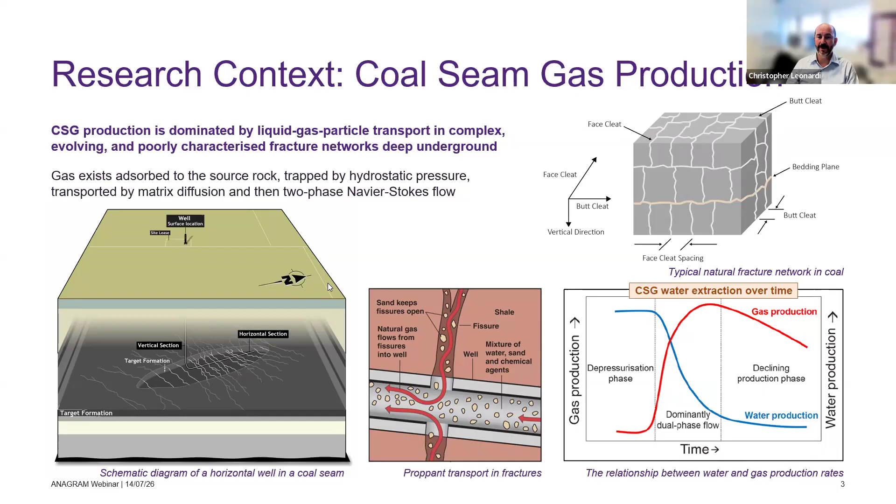So the flow physics is incredibly complex, both prior to production and then once production starts. And the regime changes dramatically. We go from situations of pure water flow through to commingled water and gas flow to predominantly gas flow as well. And these things happen in, as I said, not just a primary induced fracture, but a range of cleats that interact with that fracture. And we use high fidelity modeling to try and answer some key research questions that relate to this problem.

And I should hopefully have this animation playing. It's a little laggy at the front, but what we see here is just a rendering of one of our analyses where we've got particles suspended in a primary fracture. You might be able to tell that this is a shear thinning fluid. And this fracture interacts with some branching cleats, which cause leak off of the fluid and also the formation of particle occlusions due to size exclusion at these fractures here. We can't see the fluid. We've hidden it so that you can actually see what the particles are doing.

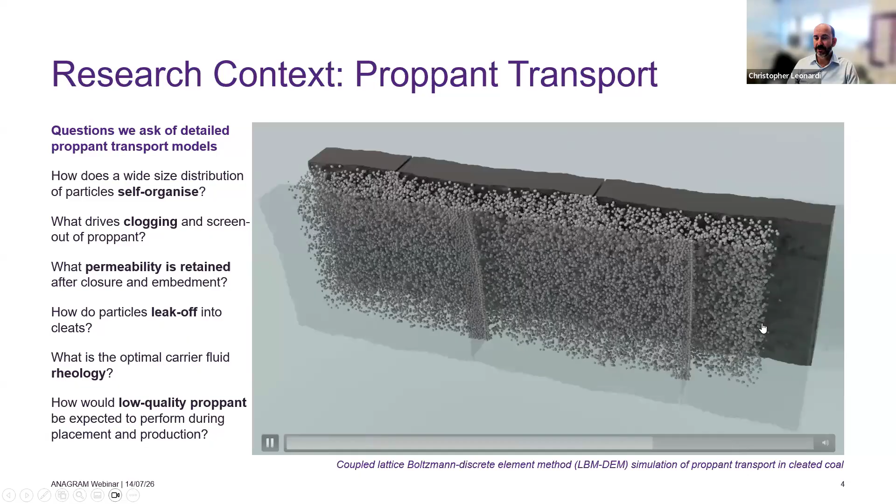But the types of questions we ask of models like this are, how do these particles self-organize when they are polydisperse? What drives clogging and screen out of our proppant particles? What's the retained permeability of our fracture after we have stopped pumping fluid?

How do particles leak off into the cleats? What's the optimal carrier fluid rheology? And as I mentioned earlier, how might a low quality proppant perform in this type of application?

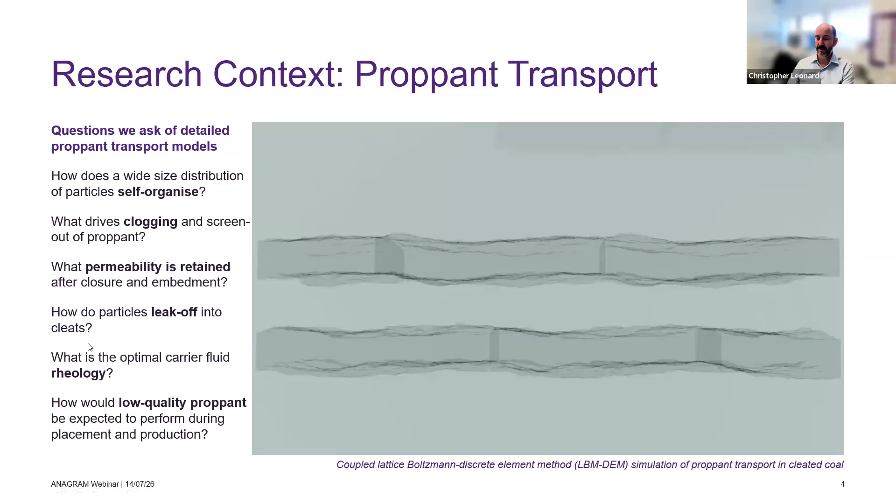As you can see in my figure caption there, we do this work using coupled lattice Boltzmann discrete element modeling. And I'll only very briefly describe that here because I don't think these things are new to anyone that's on this Zoom meeting. But we use the LBM because it's very effective and efficient at porous media flows where the geometry is very complex and also where we would like to couple our flow to a large number of moving obstacles like discrete elements.

And as we were discussing just prior to the start of my presentation, the LBM is no longer a research code. It's widely distributed with commercial CFD solvers. And although it's very good for porous media flows, it's probably more prominently used in vehicle aerodynamics, and some large companies have bought effectively research LBM codes to do aerodynamics of cars and trucks in a commercial setting.

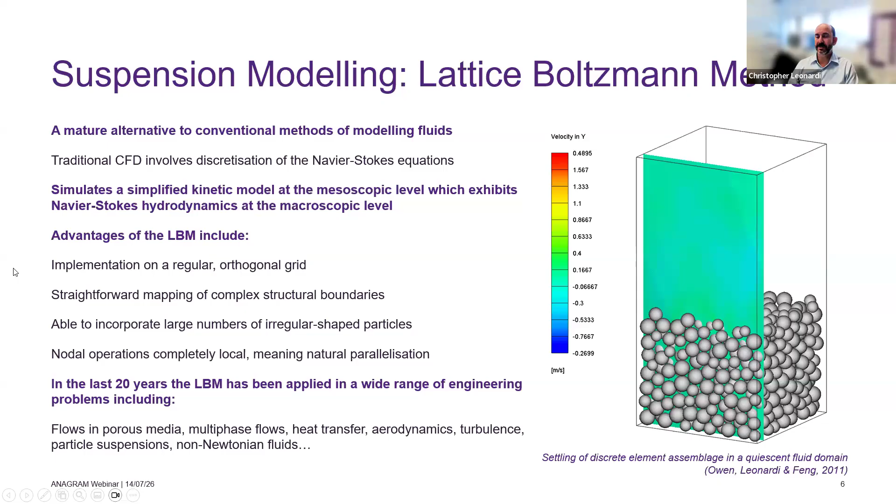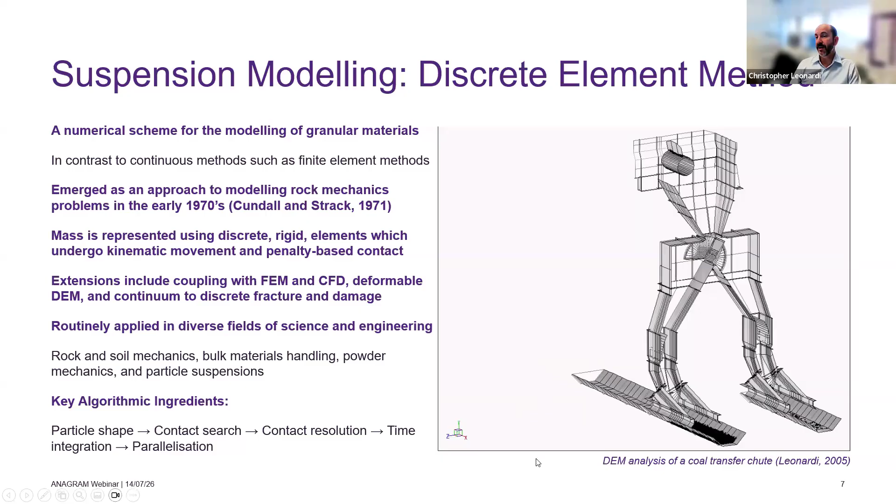And I remember presenting work like this at the International Conference on Bulk Materials Handling that is held in Australia, and being one of maybe the only people presenting bulk materials handling work using discrete elements. And these days, I haven't been to that conference series in a long time, but I do know that the work is somewhat dominated by computational analysis now, which is nice to see, but certainly not something that I'd take credit for.

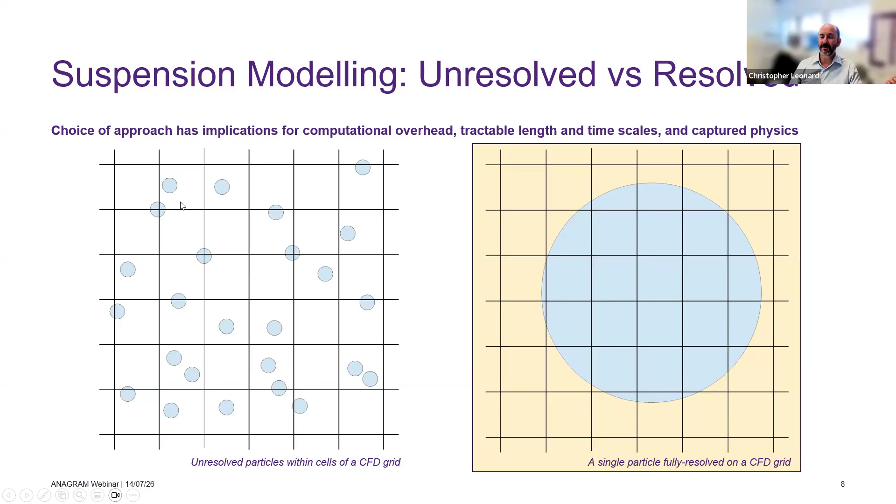So for that introductory video that I showed you, we would be talking of hundreds of millions of lattice Boltzmann grid points, even though the particle count is on the order of 5 to 10,000. And the memory requirement on GPUs is also substantial. So tens of gigabytes, and some of the really big analyses are approaching 100 gigabytes. And so this is to be contrasted with, say, a CFD DEM approach using finite volume, where the particles sit as a mass fraction within a finite volume cell, and the momentum equations are coupled accordingly.

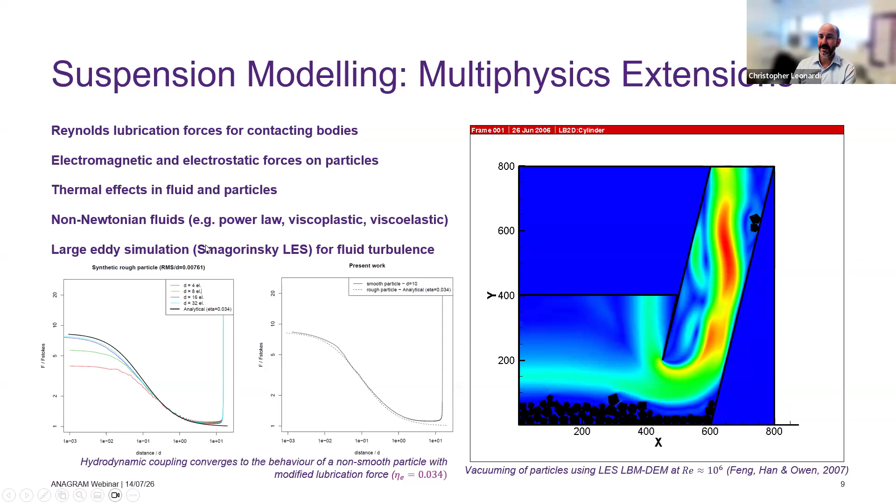And in particular, an implementation of Reynolds lubrication that acknowledges the fact that the Reynolds lubrication force is never truly singular for particles that have some roughness that's relevant to their length scale. And so the force, as these particles get close together, asymptotes to some value, although there is definitely an additional finite repulsive force there. It's not infinite as the gap between particles approaches zero. And that's a very convenient physical reality that makes the modeling just that bit easier.

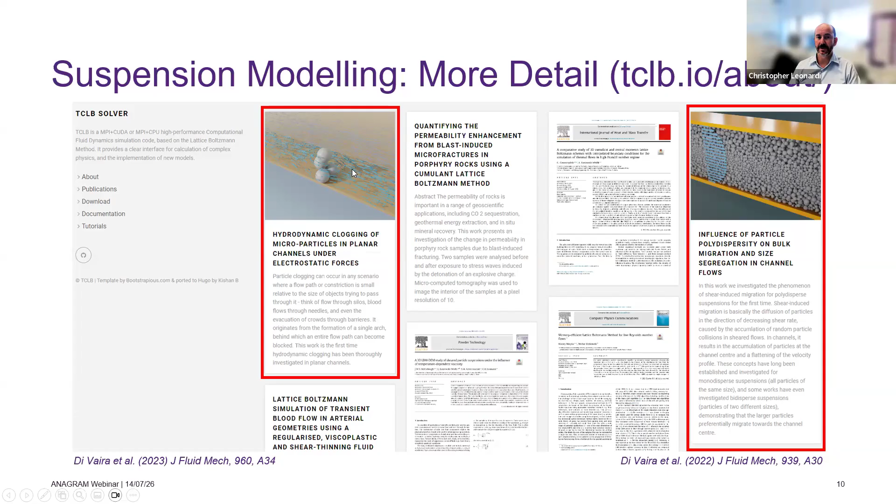So the tools we use are open source. So the stuff I show you today has been done using LIGGGHTS, which is coupled into our LBM code. We have previously coupled in ESyS-Particle, which is a DEM code from UQ. And my collaborator Lukasz from Poland has also coupled in another DEM code from France. I think it might be Yade from memory. But if you are interested in how this works, you can download the source, you can compile, and you can run some tutorials, and you can play with the stuff that we've been developing, and you can also read about the implementation in these two key papers that are summarized here.

So in terms of applications, the first one I want to talk to is about the transverse migration of polydispersed particles in a channel. And so from a coal seam gas perspective, what that was motivated by was this idea that microparticles could be injected with the hydraulic fracturing operation to enter branching cleats and stimulate them. So have these very small particles enter the branching cleat network and remain in place once the fluid flow has stopped to keep those cleats open when the well is producing gas.

And one of the key challenges to this idea is that size control on that type of particle is very poor. So if you are looking to buy a few cubic meters of micron scale particles, you are not going to get a very tight size control on the product that you purchase unless you pay a prohibitively high cost. And so for a particle that has a median size of, say, 20 to 50 microns, you will have a range of anywhere from a few micron up to about 100 micron of diameter in terms of the product that you get.

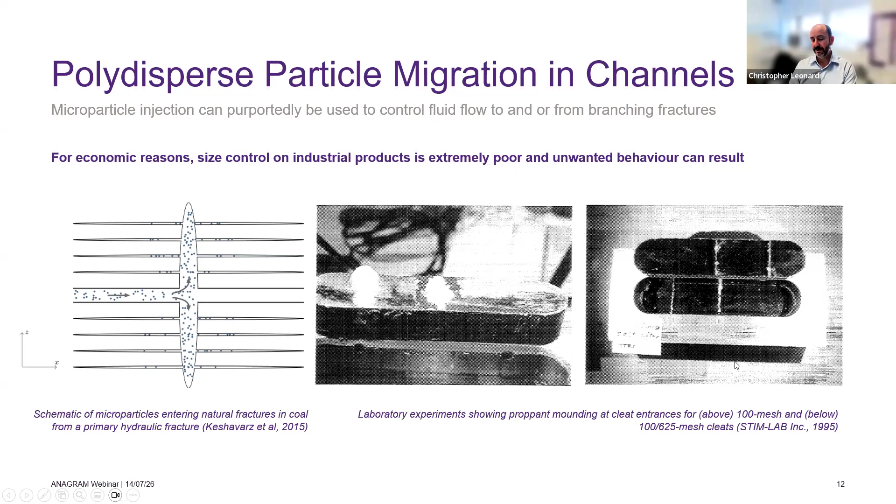And so we were interested in how this product might flow in a fracture and how it might enter the branching cleats that you can see schematically here next to this primary fracture. And we were inspired to some degree by some experiments that were done in the US back in the 90s that showed some really interesting behavior. So occlusion formation at these cleats, or otherwise cleats that admit but then fill with these small particles as well.

So in this particular problem, the length scale is not so much the issue, but more so the issue is the number of explicit time steps that are required for things to equilibrate. And there's two things that need to equilibrate here. There is the bulk migration of this set of particles inside the fracture, and then there is size segregation, and they happen at different time scales, and the latter happens at a much longer time scale than the former.

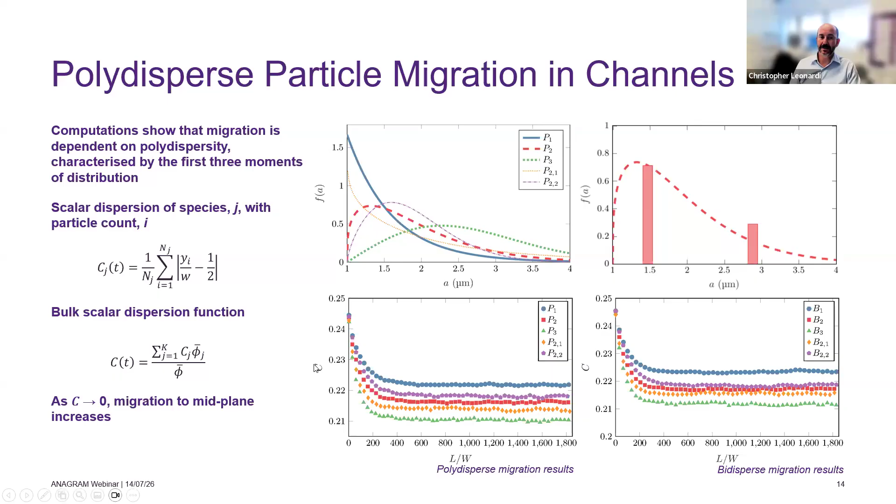If it's polydisperse and there's an infinite, well, a semi-infinite set of diameters, then it's much more difficult to classify which diameter particle you're seeing where. And so these links that we were able to show with the modeling are very useful. But I think even more interesting than that was the data that showed the emergence of this reverse migration, where small particles accumulate at the center of a channel under certain conditions, under what is known as reverse migration.

And so what we found was when the solid volume fraction is above 0.3, not even as high as 0.4, and the flow conditions are right, we start to see the formation of this plug of small particles, and this plug will actually start to over-consolidate at the center of the channel. This is not what we expected. We hadn't seen these types of results in the literature before, and it's actually the exact opposite of what we were trying to achieve, which was to have these small particles migrate to the walls and then find their way into the branching cleats and then deeper into the reservoir.

Why this happens, as far as I know, is not yet fully described, but we are kind of aligned with this theory that had been previously proposed, that the higher shear fluctuations of these smaller particles, particularly at the boundary of the plug, drives a certain number of them into the plug with time. And so small particles fluctuating at the edge of the plug eventually enter the plug and continue to feed that system.

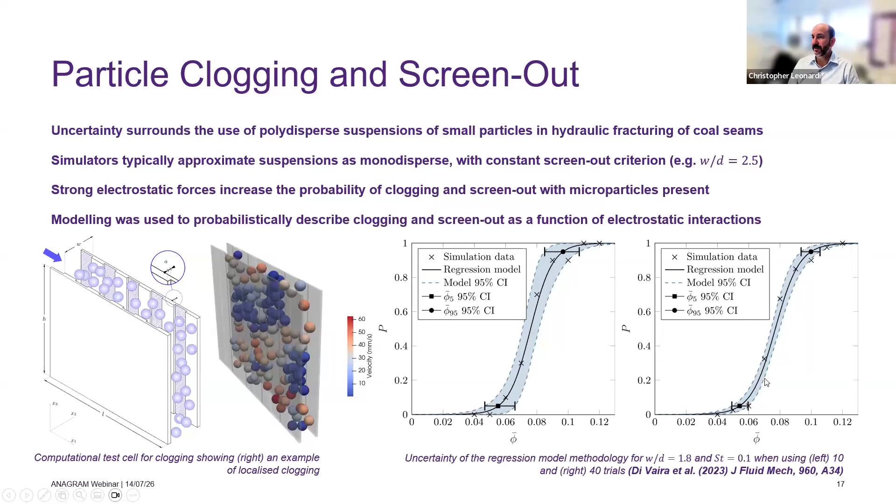So phi 5 is the solid volume fraction when you have a 5% probability of a clog forming. And phi 95 is the solid volume fraction when you have a 95% probability of a clog forming. And so we pick those numbers off from a bunch of different tests of varying parameters, and then we plot them on some maps that look like this.

And so we're plotting here phi 5, the bottom line with the squares, and we're plotting phi 95, the upper line with the circles, for a range of W on D numbers. And so the first thing that we notice is that you can form clogs above W on D of 2.5, and we saw that here up in these numbers.

What we also saw is that when you start with a very narrow fracture where it's only a little bit wider than the particles that you're transporting, and you get wider, clogging actually gets more likely. The solid volume fraction required for clogs to form drops quite significantly, and that's because of the mechanics of particle interaction. So just below W on D of 2, you have the ability for two particles to almost but not quite travel parallel to each other down the channel. And so when that happens, they interact with each other and the walls and they form a local clog.

And as you get wider again, we get this region around just over 2 where we saw no evidence of clogs ever forming. But then as you get wider again, you have the ability for 3 particle clogs to form. And so that's why we see these data here emerging. You can also see rather intuitively that as you increase the friction, which we tune for these models based on some other data, you increase the probability of clogging or you reduce the solid volume fraction required for clogging to occur.

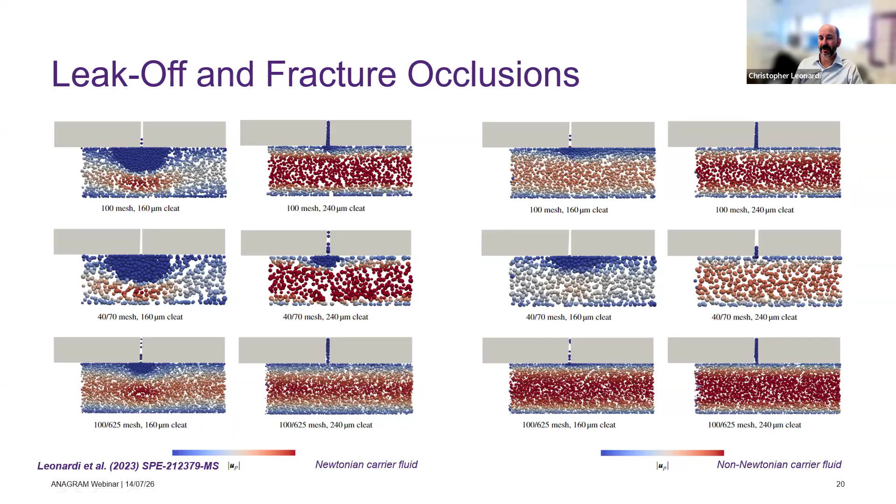Okay, so the last thing I want to focus on is this work here, which was to analyze the performance of what I'll call a low quality sand. And what I mean by that is a product that doesn't meet the API definitions of what a proppant should be like. And it doesn't meet those definitions for a couple of reasons. It's very angular. Its crush resistance might be a little bit poorer than what you would expect for an API standard sand. But being a non-API product, it's a lot cheaper.

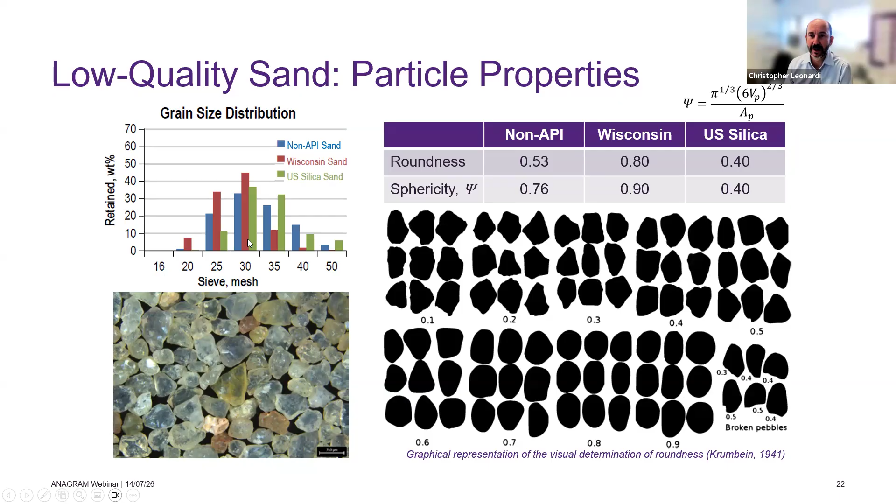And so if you are trying to source sand in southern Queensland, you have a limited number of API product suppliers, and they're not local, so they have to be transported from elsewhere in the country or have to be shipped in internationally. And so the idea for this work was to use a sand facility from southern central Queensland and the product that they provided, which looks like this photo here. Yes, very angular, very poor size control, and crush resistance a little bit mixed as well.

So we're interested in two things: how this product flows in the types of fractures it'll encounter, and then what it will do after it's been placed inside a fracture. And so we try to parameterize this as best as we can, given the wide degree of uncertainty with all these things. And so the first thing we do is we parameterize the fracture generation using a power law model of the fracture roughness, and then also incorporate the surface correlation and the aperture.

And so basically we generate our fractures from this mathematical model. We can inform the mathematical model from the statistics of some imaging. So we did some digital optical microscopy to determine what the roughness spectrum is of some coal samples. And then we use that to inform this model, which then allows us to generate as many realizations of rough fractures as we like, as you can see over here on the right-hand side. This one here has a mean width of 0.5 millimeter. It has a mean roughness of 20 micron, and the surfaces are perfectly correlated.

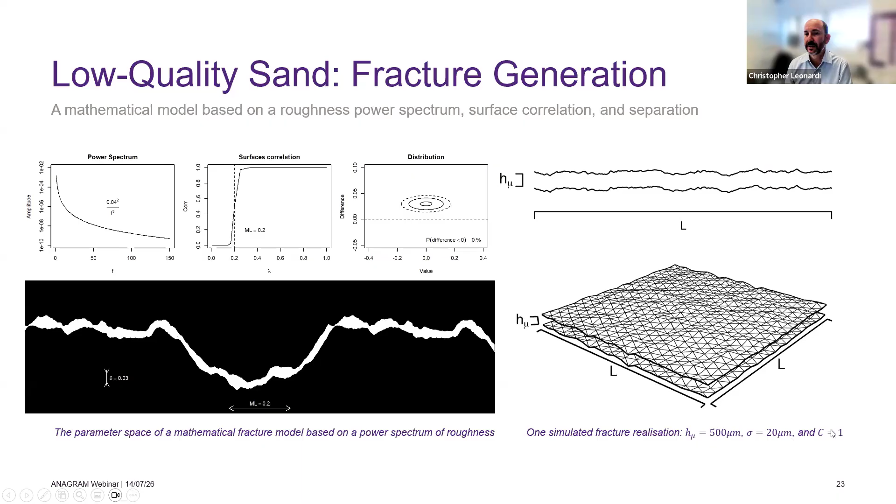Over here, you see some more examples of the fractures we generate, and on the right, you see one where the fractures are not perfectly correlated, so C is 0.8. At 0.8, the decorrelation is tricky to see by the naked eye, but it is there. And as you go below 0.8, it becomes more and more obvious that the surfaces are not perfectly correlated. In reality, these surfaces can decorrelate for any number of reasons, because of shear dislocation under lithostatic stresses, or because of mineral growth over time within these cleats, or any number of other reasons.

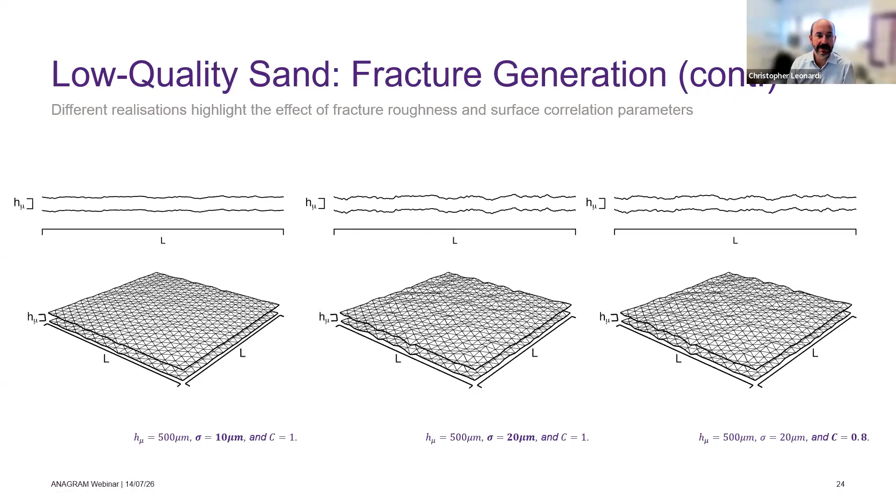The next thing we needed to do was try and parameterize our particle angularity. On the left-hand side, this is Lachlan's attempt at rendering or creating these sand particles based on their true statistics. To model with particles like this would be very expensive. You can see there are many facets describing each particle, and the contact resolution and detection for that

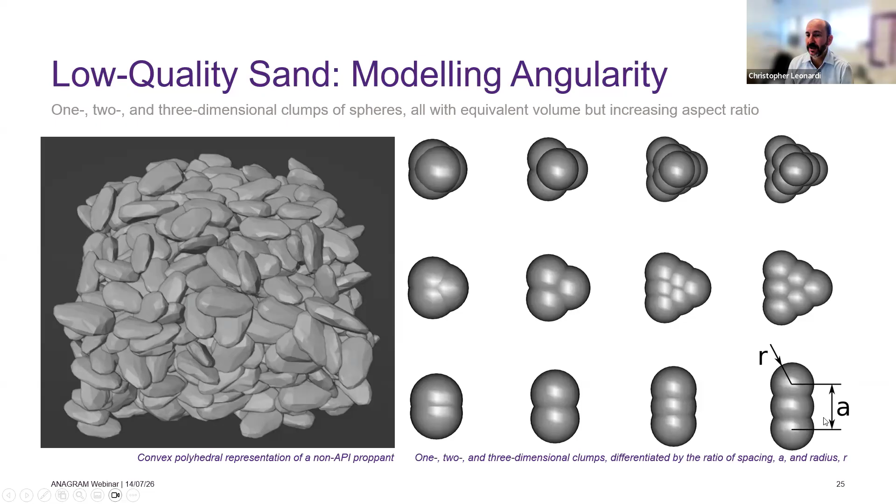would be very expensive. And so what we decided to do was build some canonical particles that were 1D, 2D, and 3D out of clumps of rigid spheres. And we described their shape based on the ratio of the longest length, A, along a side, and the radius of the particle that makes up the clumps.

Once we have some fractures and some particles, we can flow them, and they look like this. So you can see the zero-dimensional spheres, 1D clumps, 2D clumps, 3D clumps. And if you spend some time watching these different videos, you see local holdups occurring, particularly for the 3D and the 2D particles as they interact with the walls and other particles in the pack. But that obviously is of limited use from a quantitative point of view.

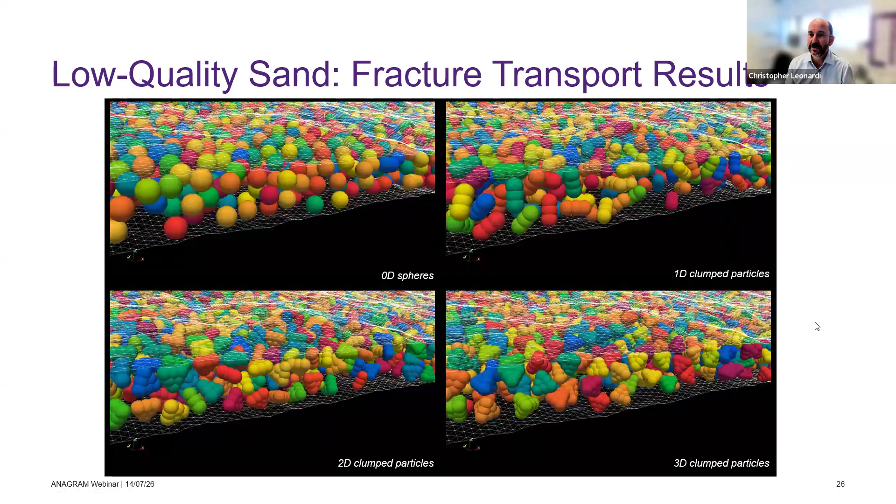So what we did with these data is we generated these graphs of flux versus volume fraction. And so on the y-axis, we have the flux in the fracture that's been normalized by the cubic law for Poiseuille flow in between two parallel plates. And on the x-axis, we have the volume fraction up to, of course, a number of about 0.6, where we would expect absolutely nothing to be moving beyond that point.

Our data from the simulations are the black lines with the solid black symbols. We also plot here some reference information from the literature and from the industry. So the first one, this dashed line here, is what you would expect from a Krieger-Dougherty suspension viscosity, defined like this, where the viscosity varies as a function of phi m, and phi m is your maximum flowing solid volume fraction. We also have on here the dotted line, the Kozeny-Carman law for effectively flow through a packed bed.

And on this graph, we also have this red line, which is a screen out criterion from the oil and gas literature. And what it shows is that, under these conditions, we would expect flow of this suspension to effectively stop at a solid volume fraction of about 12%, at which point it would drop down to flow through a packed bed. And so the flux, which is non-zero here, but it's a bit hard to see, would just be of the fluid flowing through a screened out bed of particles.

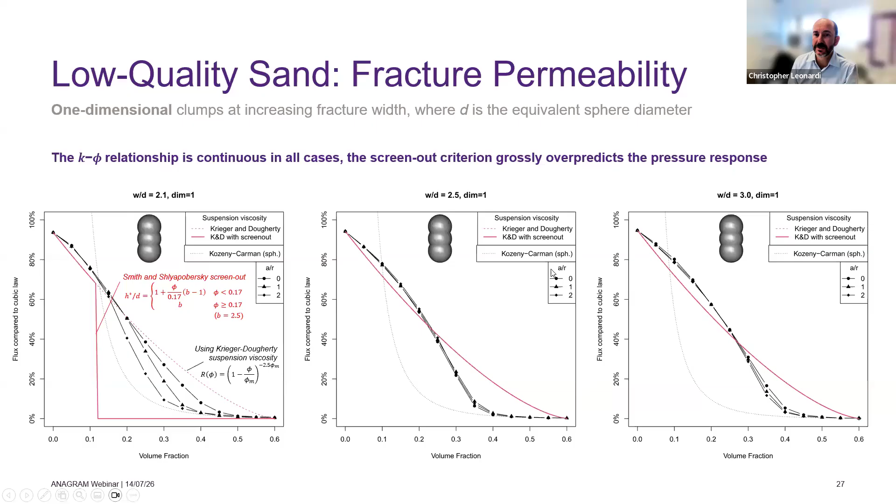But in summary, what we can say from these types of results is that the ability to flow these angular particles through a rough fracture is probably pretty good. We would expect the primary fracture to be more than wide enough for the angularity to not matter. And so whether it was a sphere, and some of the API sands are quite spherical, or whether it's one of these nasty angular looking things, they'll transport quite well.

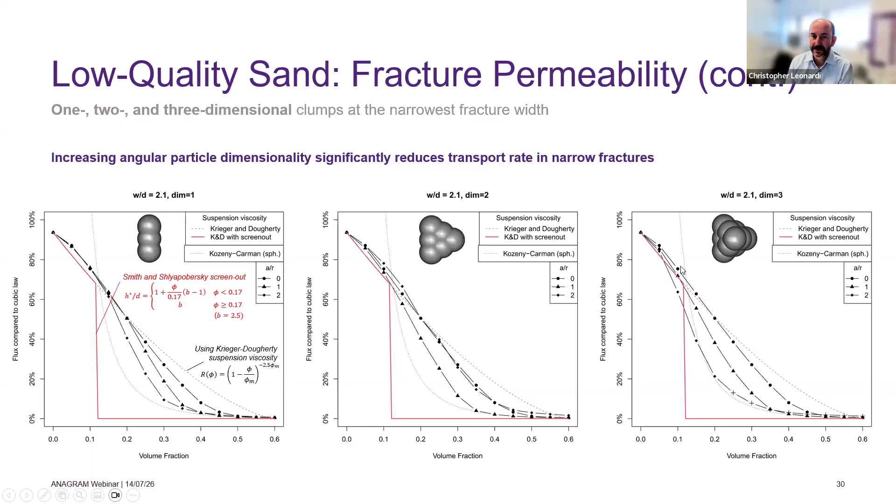Beyond that, what we did was then look at how packs of these particles would behave once you started to flow water and gas through them. And so imagine your primary fracture packed with these non-API sand particles, or packed with a Wisconsin sand, which is an API product, or just packed with some spheres.

And then you had fluids flowing through them, and those fluids could transport some smaller particles, some fines that could have been produced from the coal or from the adjacent sandstones, or some very small particles that were injected during the hydraulic fracturing process and are now looking to flow back. And so we're interested in how these things either screen out or percolate through these packs of particles.

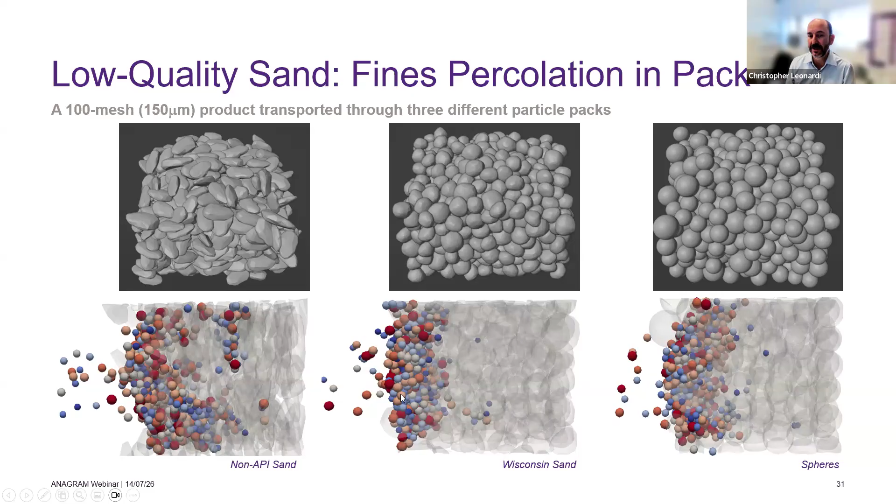What we did is, well, first we analyzed the pore space that's generated from these different packs. And so what you see is that for our non-API sand, which have a wide size range and are very angular, our pore size distribution is pretty broad. Okay, so we've got plenty of pores that are down in kind of like the 10 micron radius range, and then plenty that are up around 120. So there's quite a wide variation in the pore sizes.

And you can see that contrast when you look at the Wisconsin sand, which is more tightly clustered around the mean. And then for spheres, it's even more clustered around the mean, which you would expect because it is a spherical pack. So for this non-API sand, you've got some small pore throats and you've got some big pore throats, and they exist distributed throughout the pack.

So what we did in terms of modeling is that we created packs of these three different particles, and then we flowed 100 mesh product through them in suspension. So 150 micron particles flowed through these packs, and then we measured where these particles would end up in these packs. So if you imagine this graph from left to right represents the pack, we could measure the percent of deposited particles as we increase the depth into the pack.

We were able to check that our model is making sense by comparing the data for spherical and even Wisconsin particles, which are near spherical, to some data from the literature. That's this blue line here. And then what we could see is for our non-API sand, we were trapping a lot more particles in the pack than you would do if your pack was of spheres or of Wisconsin sand. And you see that in terms of the average breakthrough rate. So a much larger proportion of the particles entering the pack, but then getting trapped in the pack.

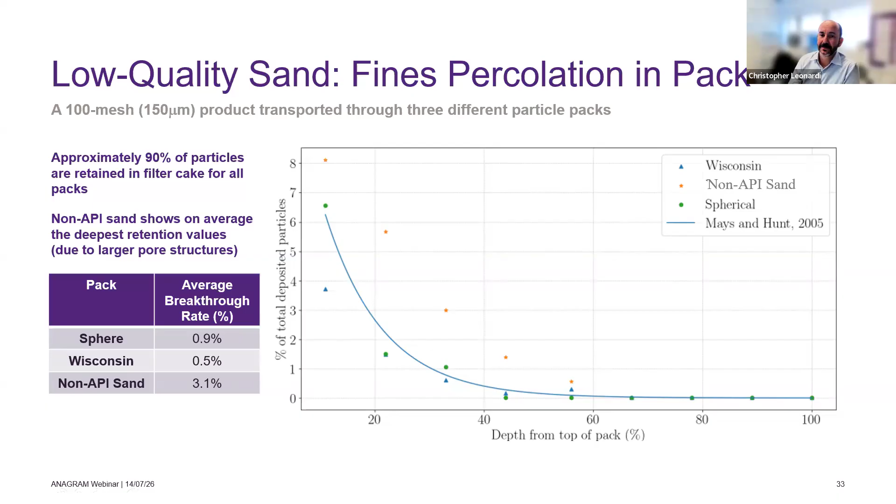And then going beyond that, you could see what that means in terms of the pressure drop in that pack. If you're first of all admitting more particles into the pack because there are some large pores, and then screening them out because there are some small pores, you start to see a degradation in the head loss. And so if you look at the stars here, that's the pressure drop or the head loss for our pack of non-API sand. We see about a 26% greater relative head loss in this pack than you would for spheres or for Wisconsin sand.

And so from an operational point of view, that's potentially problematic because you have a situation where you will admit lots of fine particles into your conductive fracture and then screen them out. And over time, you will degrade the conductivity of that pack, which is not good from a productivity point of view.

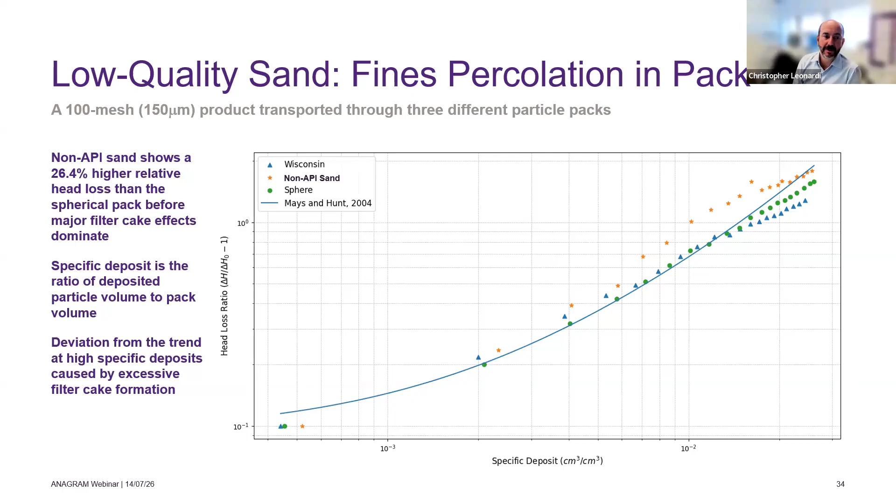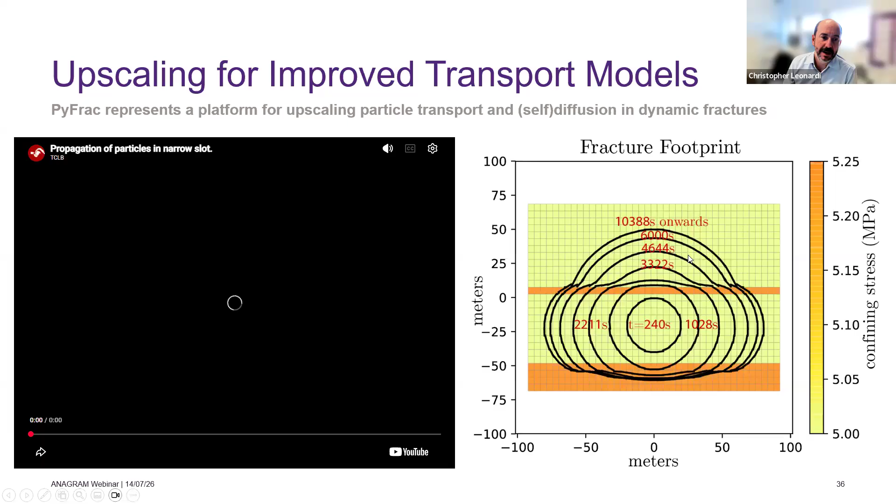But then on the right, some work that I started while I was on sabbatical last year at EPFL in Switzerland with Brice Lecampion and his group, who published PyFrac, which is a simple hydraulic fracture solver, which allows for the dynamic evolution of fracture width. Because in all of the work that I've shown today, the fracture width remains static. It doesn't change because of an increase in pressure or a change in the prevailing stress conditions. And so that's something that we feel is important for really understanding what's happening at fracture tips in terms of screen out as well.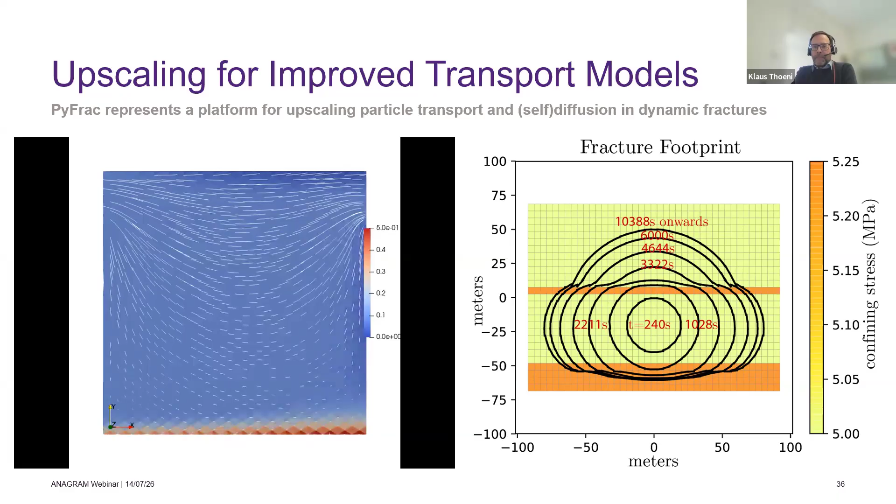I guess if you have a question, just unmute yourself. Yeah, can I start? Yeah, go ahead, Arman. So, hi, Christopher. First of all, sorry, I joined a bit late, so I didn't get a chance to say hi. I'm Arman from UNSW. Also, hi to all the rest of you. I think you just froze there, Arman. Yeah, we've lost him. Can you hear me okay? It's been cutting in and out, but I can hear you now. All right. So hopefully it stays connected.

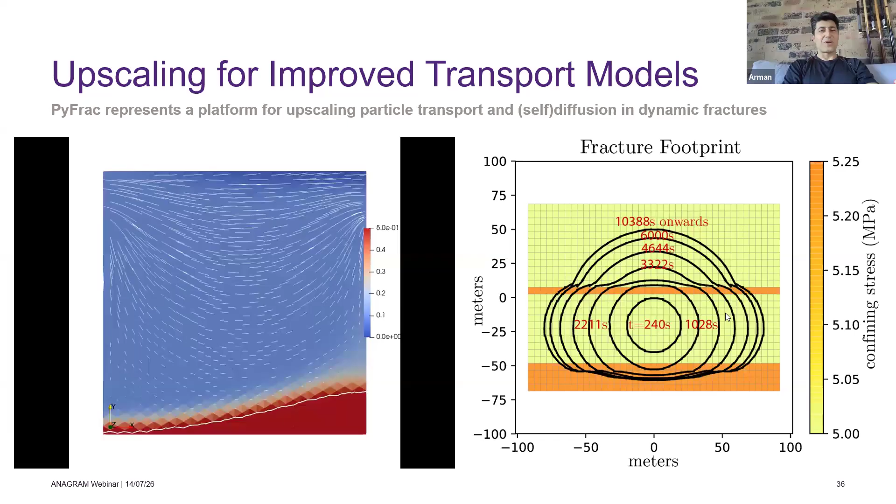So yeah, my question is on multi-phase modeling, which I understand you have done some work on. I kind of dabbled in it, modeling flow of water and air in an unsaturated porous media. And in most cases I encountered numerical instability. I think it was mainly because of the difference between density of air and water, and I couldn't get good results out of it. Not that I worked a lot, I kind of dabbled in it, but I thought I'd just pick your brain on that. What is your experience on that?

I didn't talk about that today, but I have some slides on exactly this. We're using a phase field LBM formulation, where we take those rough fractures that I showed earlier, and we solve for gas and liquid transport in these fractures. The contour here is showing the local fracture width, so it varies, and then the hatched region is the liquid, the water. The air is unhatched. So these have a density ratio of about 1,000 and viscosity ratio of about 100. And it's pretty robust.

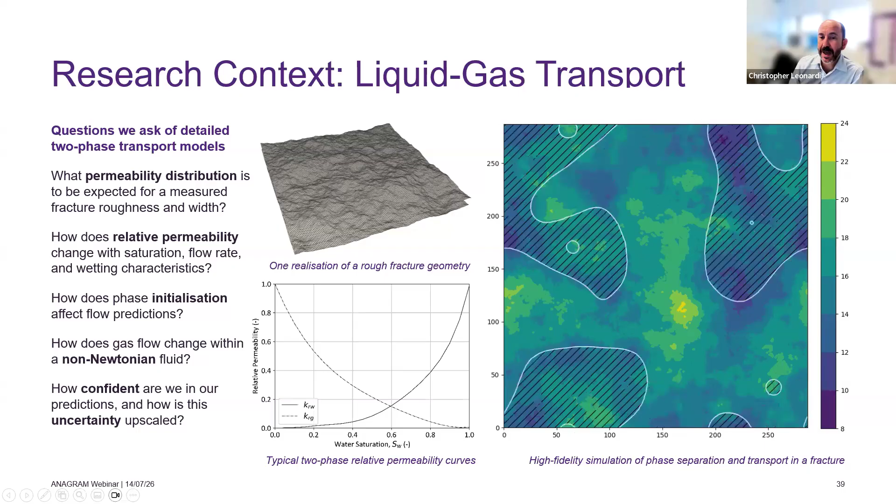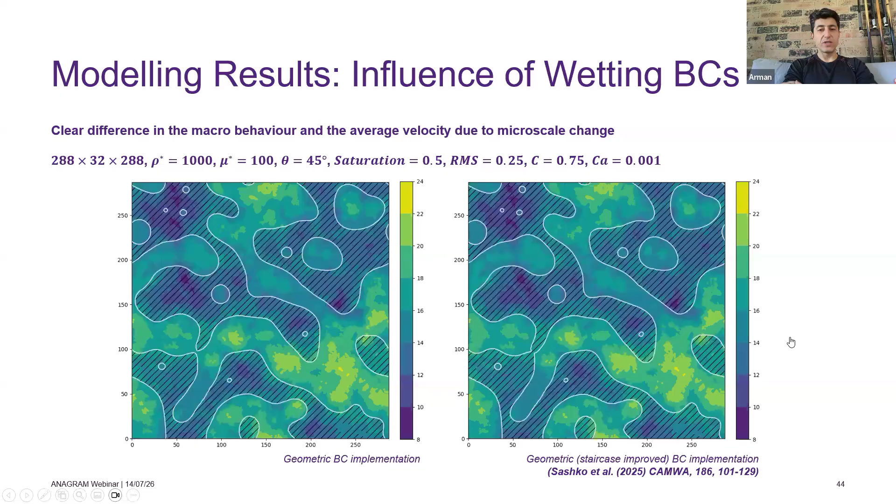Sorry, but what is the degree of saturation, Christopher? Sorry, what is the degree of saturation? So we map out the saturation entirely, and I'll just cut to some results that show you what that looks like. Because my experience was that at low and high, especially I remember at low degree of saturation, I couldn't get anything out of it. No, so I'll show you.

There's a whole bunch here on initialization, but this is the kind of stuff that we can generate, where we not only create REL-perm curves, but we quantify the uncertainty at which they exist for a certain fracture statistics. And so we generate 10 to 30 different analysis results for each saturation point on this REL-perm curve. And from the results of each of those runs, we can define a mean, a standard deviation, confidence intervals, etc.,

and then see regions where stuff just will not flow, where one phase is trapped, or where the other phase is trapped, or where they're co-flowing, where you have viscous coupling, where you have X-curve behavior, where you have pi curve behavior. So we find once you deal with the tricky boundary conditions, that it's quite robust.

All right. And I imagine you can do similar particle tracking within this unsaturated modeling as well. Would that be? Well, to some degree, but the challenge which we have not yet addressed is what happens when particles want to traverse the phase field boundary, right? Because we're using an immersed boundary type approach where the particles have some ghost fluid behind them.

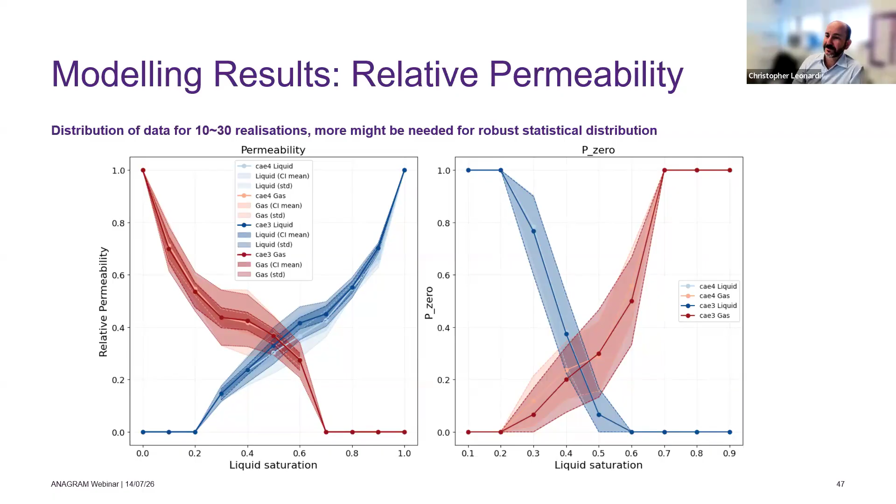And so if that particle traverses from a liquid to a gas region, there's a challenge related to how you deal with that immersed fluid or that ghost fluid. And we haven't quite dealt with that yet. All right. Yeah, interesting. Thank you.

No worries. I'll get back to the main presentation here. Thank you. We have Mahsa, if you want to ask your question. Yeah, thank you, Christopher, for your talk. I have a quick question, maybe a bit basic.

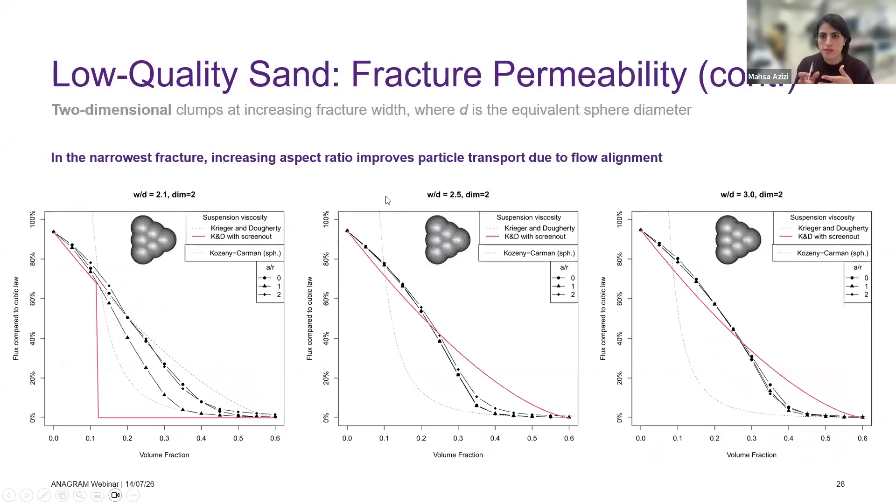You talked about the interaction between particle and particle and particle and wall. I was a bit confused about how you quantify this interaction between wall and particle. For example, if you looked at the stress field in there or force, or it was slide 19. Yeah. Thank you. So there's two things going on there.

So the first one is that we still use and solve a standard soft contact model for the discrete element method. So a penalty-based method that says that for some given overlap, there's a repulsive force, which will drive a particle away from another particle or away from a wall. And of course, you need to set up your DEM solver such that that overlap is never too large and that your contact velocities are never too large as well.

But then we have these forces, which are calculated from DLVO theory for electrostatic interactions. And so here we've just non-dimensionalized them by some other relevant parameters in the problem. And so these are just measures of the electrostatic attraction or repulsion of particles and other particles or particles and walls. And so this exists on top of the mechanical and hydrodynamic forces that emerge between particles as they interact with one another and with the walls. Thank you. No worries.

Hi. Hi, Christopher. Great work. Really nice to learn about your work. Very nice.

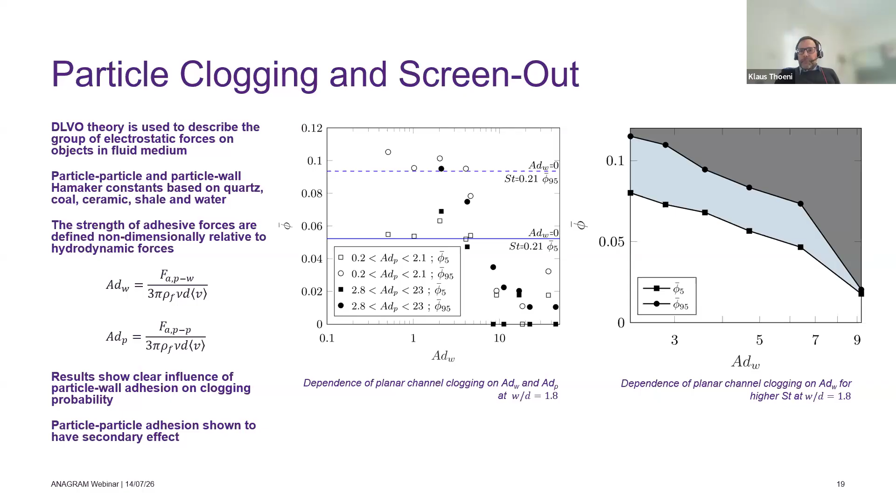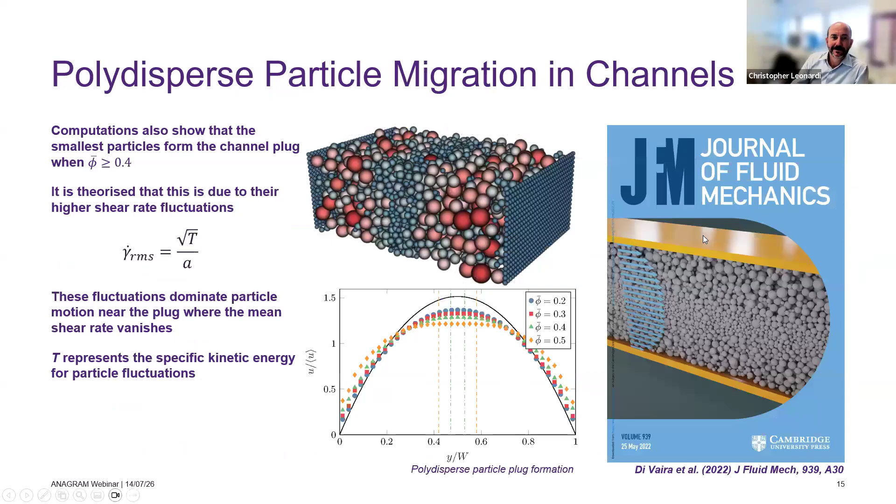Thank you. Any other questions? Otherwise, I might throw one in, Chris. At the beginning, you mentioned that with the DEM part, you started with ESyS-Particle. Now, I know Dion very well as well. But you mentioned that now you're using LIGGGHTS, and you also used Yade, so I'm associated with Yade. So it's just to understand why you went into LIGGGHTS, and what the benefits are in this case.

ESyS-Particle, my perception of it as an outsider on the development was that it's very well set up for discrete element problems where you're interested in fragmentation of a granular medium, whereas LIGGGHTS was more set up for the transport of granular media. And one of the big advantages that we had with LIGGGHTS was the ability to import and map an STL of a boundary geometry. So these fractures that we import are STLs, which are generated with some scripts. We can resolve the contact between particles and each of those triangular facets very well.

I'll double check that it was Yade, because now you've caught me out. I think it was, because Yade comes from Grenoble, right? Yeah, I think it was, one of those French DEM codes. In terms of going forward, LIGGGHTS is no longer supported. Christoph Kloss and his team have their own commercial code called Aspherix, which they focus their effort on. And so the community for LIGGGHTS is shrinking.